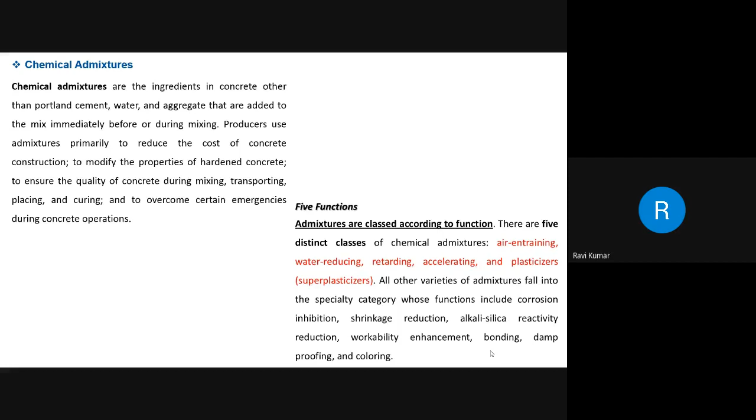My dear friends, other specialty admixtures include shrinkage reducing admixtures and alkali silica reactivity inhibitors. The shrinkage reducers are used to control drying shrinkage and minimize cracking, while alkali silica reactivity inhibitors, that is ASR inhibitors, control durability problems associated with alkali silica reactivity. With this small introduction about the inhibitors, we will move on to the next topic, working with concrete.

My dear friends, concrete is easy to work with, versatile, durable, and economical. But you should have standard operating procedures when you deal with concrete.

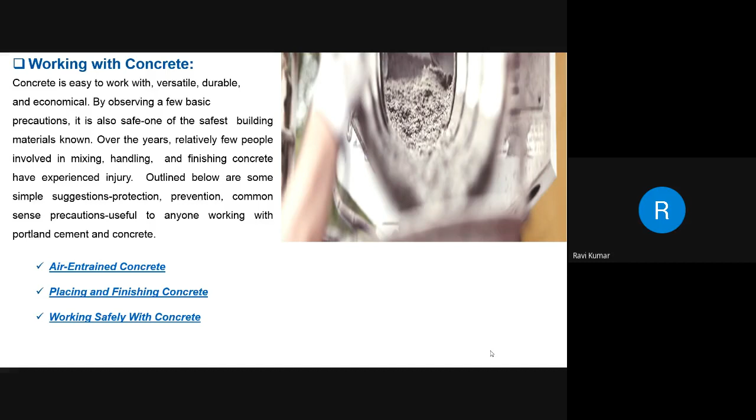When you deal with air entraining concrete, it contains billions of microscopic air cells per cubic foot. These air pockets relieve internal pressure on the concrete. My dear friends, if you see any retaining wall, there will be some drilled holes at 1 meter center to center, both horizontally and vertically. The purpose of these holes is to release the hydrostatic pressure. My dear friends, the retaining walls are designed against the earth pressure.

Whereas when the earth is exposed during monsoon, the rainwater will penetrate deep inside the filled earth behind the retaining RCC wall. It will percolate down and get stagnated at the bottom, creating a static pressure that we call hydrostatic water stagnant pressure.

For this pressure, we will not be designing. We will be focusing on designing for earth pressure. So this additional pressure has to be released. How can it be released? By introducing some holes that we call weep holes.

Through these holes, the water will be drained out. Moreover, when the water is draining out, it will wash away the filled up soil particles. To avoid washing of soil particles, a geotextile material is wrapped or pasted over the whole area so that it prevents the passage of soil particles and allows only the water through.

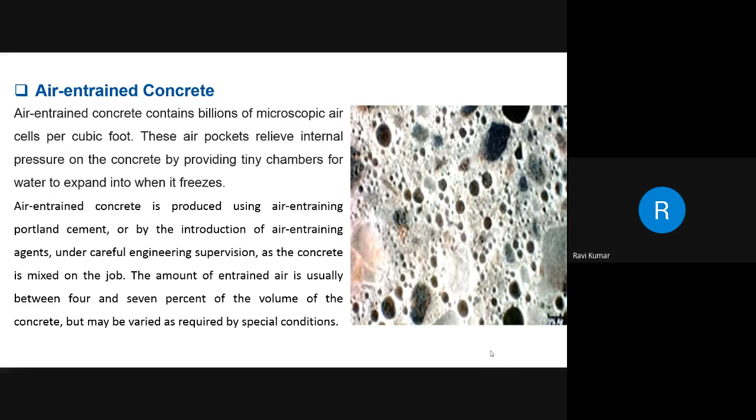Now, when it comes to placing and finishing of concrete, my friends, mixing, transporting, and handling of concrete should be carefully coordinated with placing and finishing operations. Whenever you are involved in a concreting project, preparation of concrete in the lab, mixing, transporting, and handling should be carefully coordinated with placing and finishing operations.

Concrete should not be deposited more rapidly than it can be spread, struck off, consolidated, and bull floated, and should be deposited continuously as near as possible to its final position.

My dear friends, in slab construction, placing should be started along the perimeter at one end of the work, with each batch placed against previously deposited concrete. Do not dump the concrete in separate piles and then level and work them together, nor should it be deposited in large piles and moved horizontally into final position.

My dear friends, the focus should not be just completing the concreting of a beam or slab. Your focus should be on how effectively you are placing the prepared concrete, and how effectively you are preparing it—mixing the cement, sand, aggregates, and water-cement ratio. If you want to add any admixtures, prepare the concrete suitably and effectively.

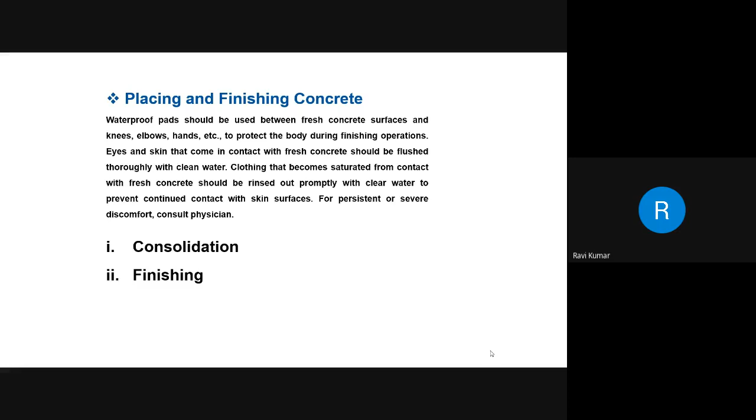Now we'll move on to the next topic, working safety. When you're dealing with concrete work, safety is very, very important. All safety precautions must be followed, and you have to use safety boards.

I don't know whether you are following this, but when you go to a lab, you have been asked by your lab in charge to come with shoes, and when you're mixing concrete, please start practicing wearing gloves, glasses, and a helmet. Start practicing the safety aspect at your work area from the lab.

When you start practicing this, you will feel easy and you will be following all the safety precautionary measures during your work in your work area when you come to the job. You also should insist that your workers under your supervision follow strictly, and you will enforce the safety measures.

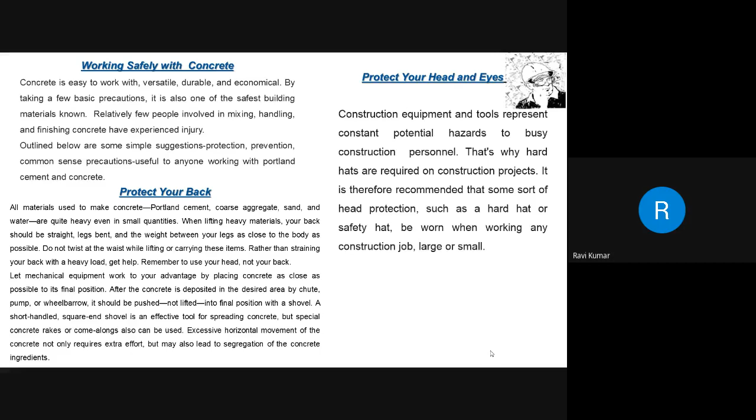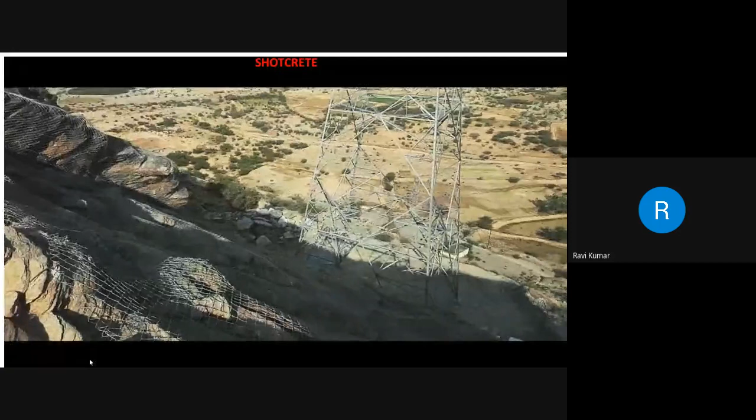Now we will see a small video about shotcrete. There are two terms, shotcrete or gunite.

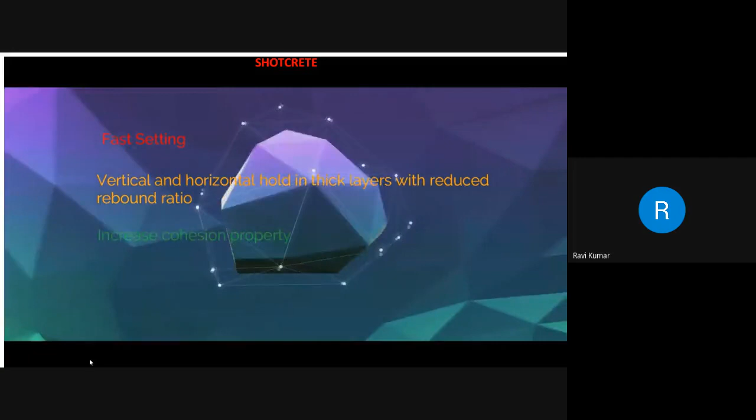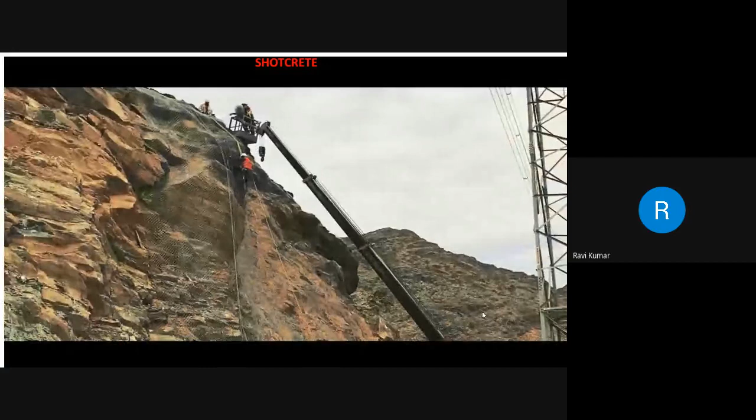Sir, are you able to hear the audio, no sir? Video is playing but audio, no sir. No sir, we can't hear it. Now sir, light. One second. Audio is too low, sir.

Perfect. Welcome back, friends, to this new video on slope protection. Here we will discuss slope stabilization by the shotcrete method.

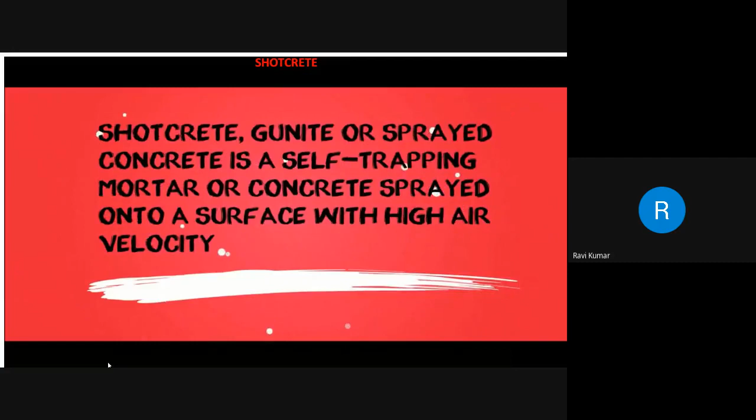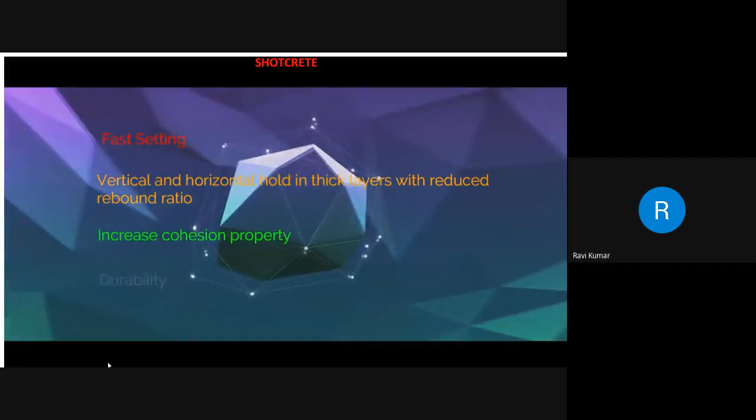Shotcrete, gunite, or sprayed concrete is a self-trapping mortar or concrete sprayed onto a surface with high air velocity. The purpose of using shotcrete in slope stabilization includes fast setting, vertical and horizontal hold in thick layers with reduced rebound ratio, increased cohesion property, and durability.

Now let us explore how shotcrete works are made step by step. At first, thoroughly clean all surfaces by removing loose materials and dust to avoid any collapse in future. Then fix wire mesh to the rock surface.

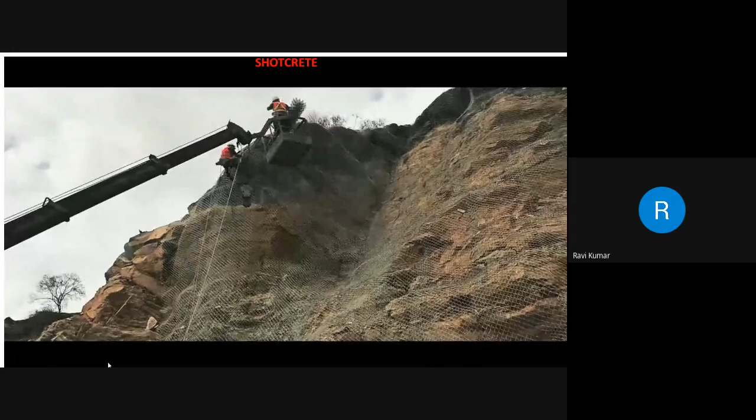The top portion of the wire mesh should rest on a stable surface where suitable pins or grouting are to be inserted over the rock. Grouting is to be done to prevent the mesh from sliding, and to ensure the mesh is in proper position and not disturbed during concrete spray.

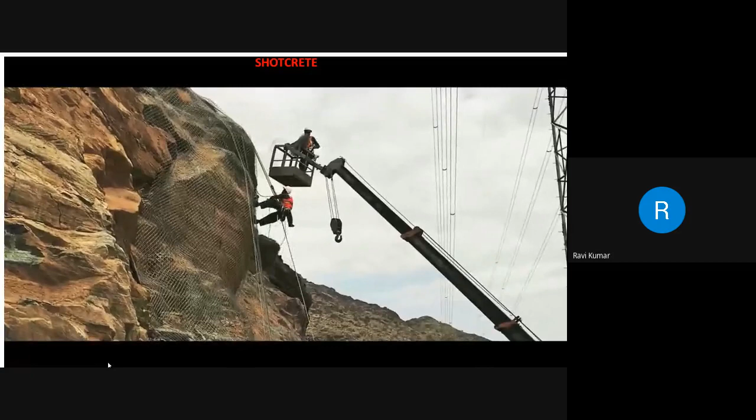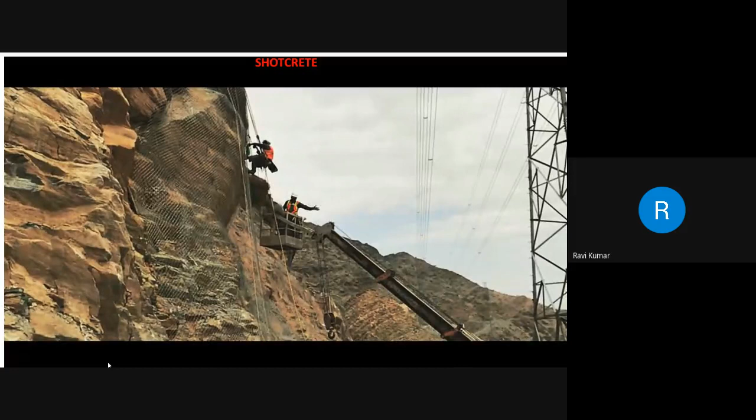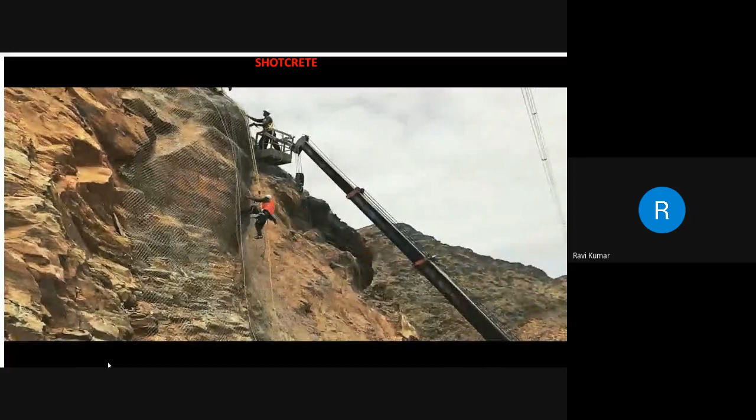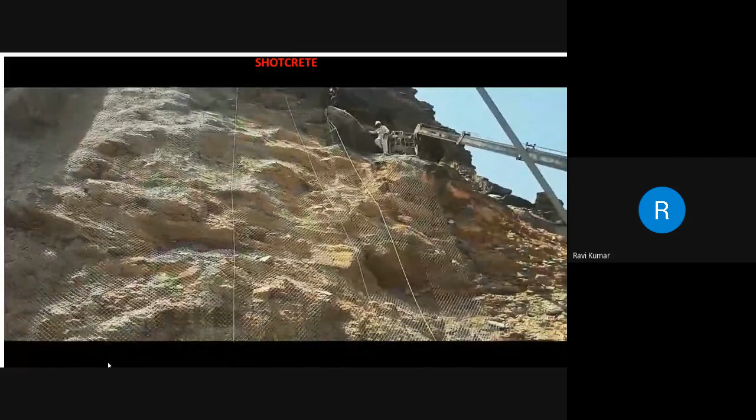The rock has numerous cracks, so by using the shotcrete method, those cracks will be arrested so that during the monsoon time, rain and water, which is the greatest enemy for landsliding as well as rock sliding, are controlled. When these cracks are arrested, even when water drains on the surface, it will avoid rock sliding or it will be minimized.

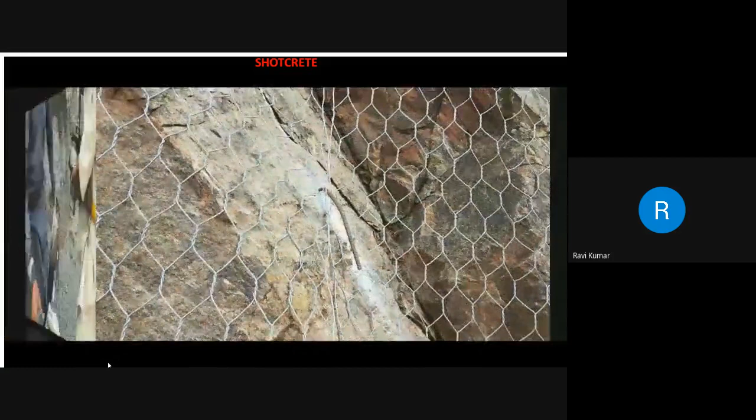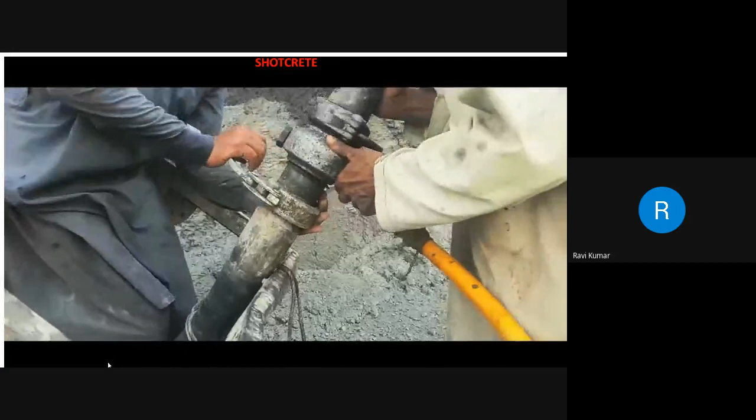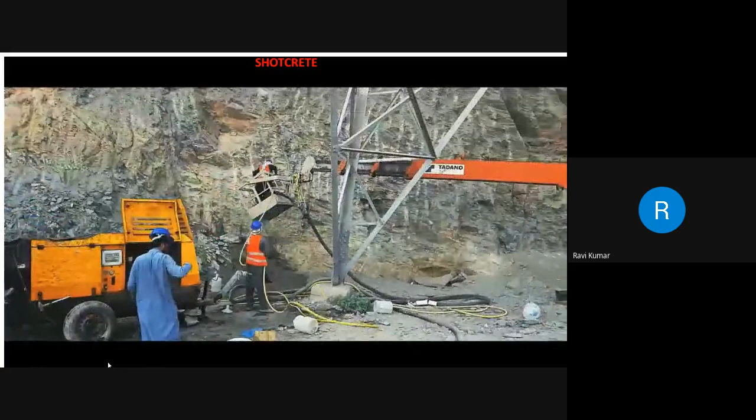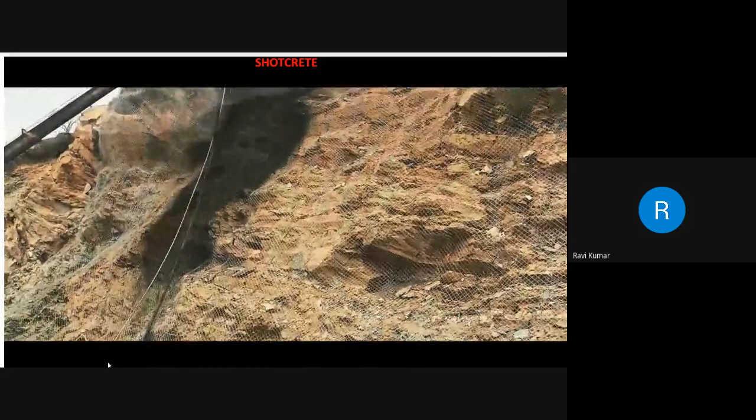When the pumped concrete mixture reaches the nozzle, turn on the compressor for air. This will help spray the concrete onto the surface with high velocity. Friends, when you are involved in shotcrete, you are going to apply the concrete at high pressure.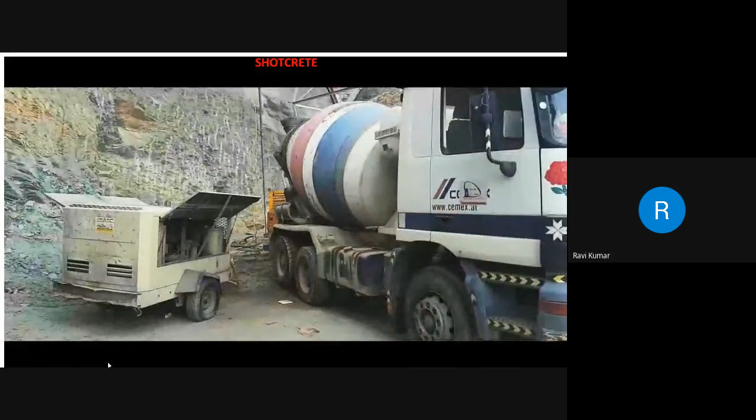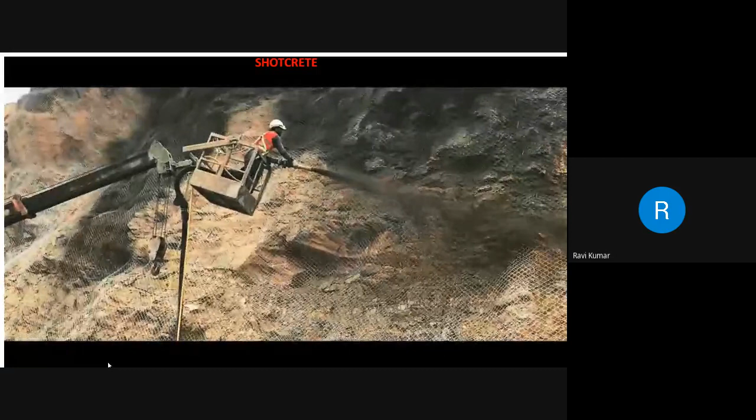If required, you can use some fiber also in the concrete mix. It may be steel fiber, carbon fiber, or glass fiber, so that the strength parameter will be enhanced.

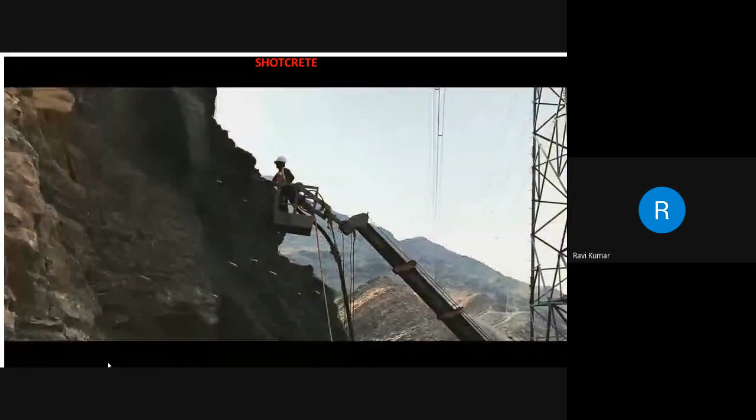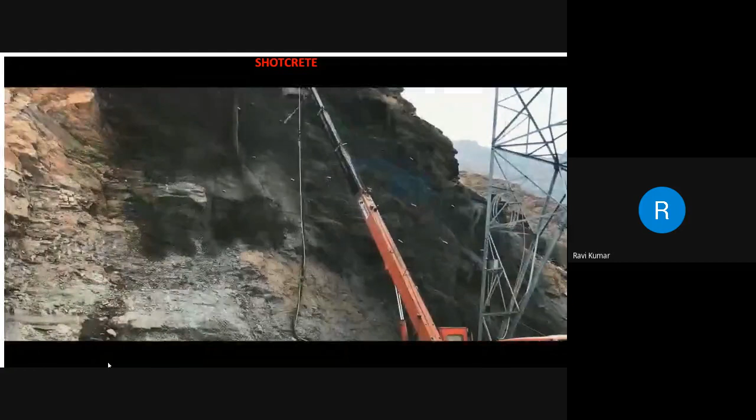Apply shotcrete evenly to the targeted surfaces and build up the desired thickness, approximately 10 to 15 mm. If you are going for a 40 mm thickness and voids are found, spray more concrete. Once the earlier sprayed concrete has attained strength, by using this methodology you will get a well-defined, well-bonded output.

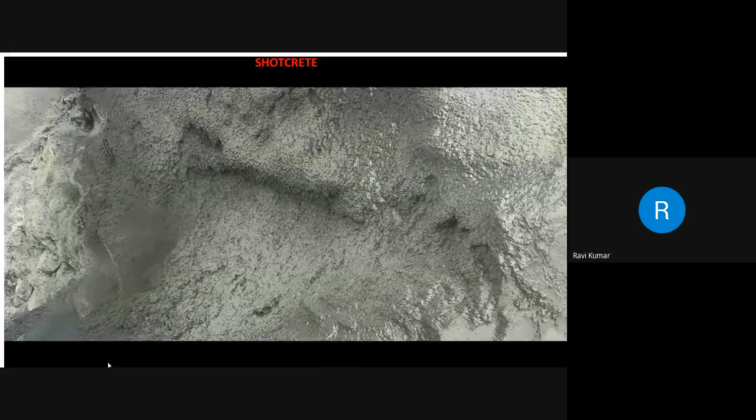Okay, so we'll move on to the next topic.

Friends, before getting into polymer concrete, let us also see what a binder is. A binder or binding agent is any material or substance that holds or draws other materials together to form a cohesive whole, mechanically, chemically, by adhesion or cohesion.

Natural cement is a hydraulic binder with rapid setting due to the formation of calcium aluminate hydrates. As a binder, natural cement has high compressive strength compared to lime mortar, but is still water vapor permeable.

Before getting into this, hello? Yes sir, yes sir. I'll just try to show one more video related to polymer concrete. Okay, just a moment, I'm stopping my presenting, I'll just take that video also. Please, just a second.

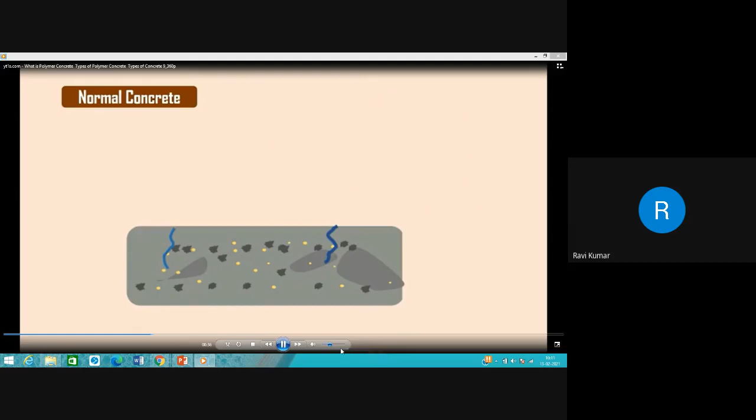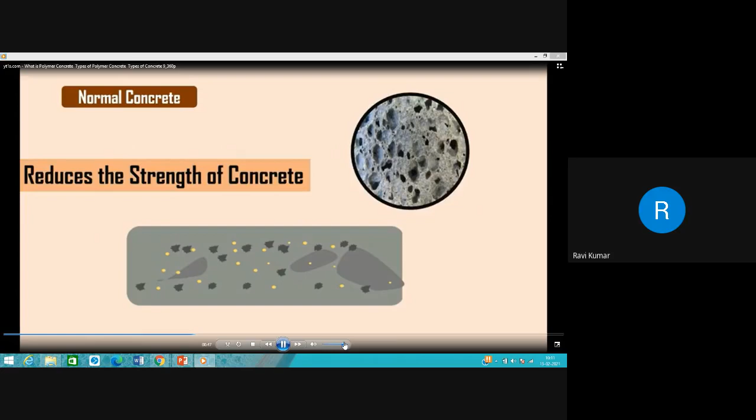Let us see a visual explanation of polymer concrete. Polymer concrete is a type of concrete that uses polymers either as a supplement or replacement for cement binders. In normal concrete, when the water dries out, it leaves pores. These pores become the entry of various liquids or gases, thereby damaging the concrete. The presence of pores also reduces the strength of concrete. To overcome these problems, polymer concretes are being developed.

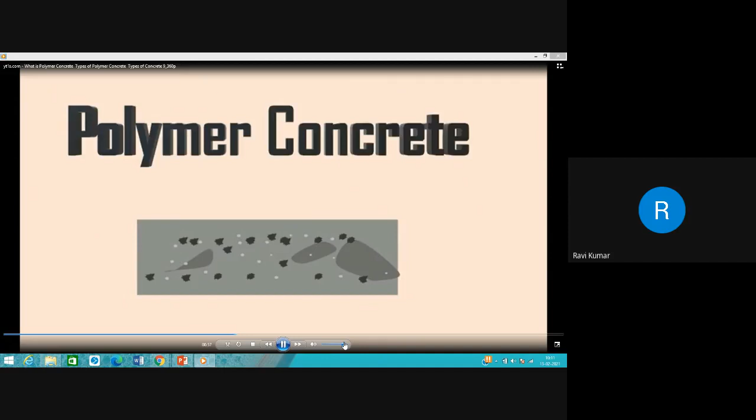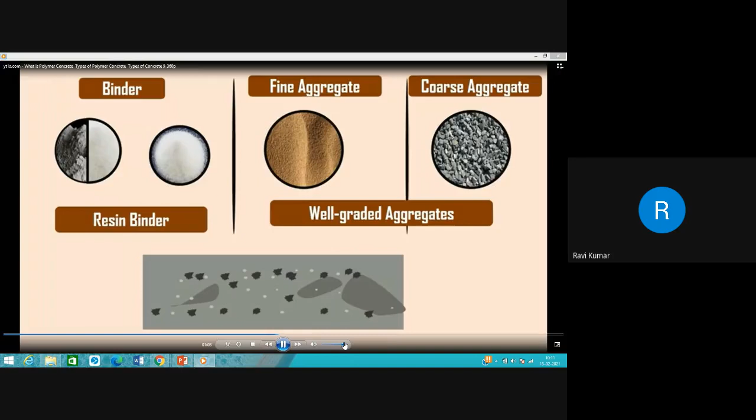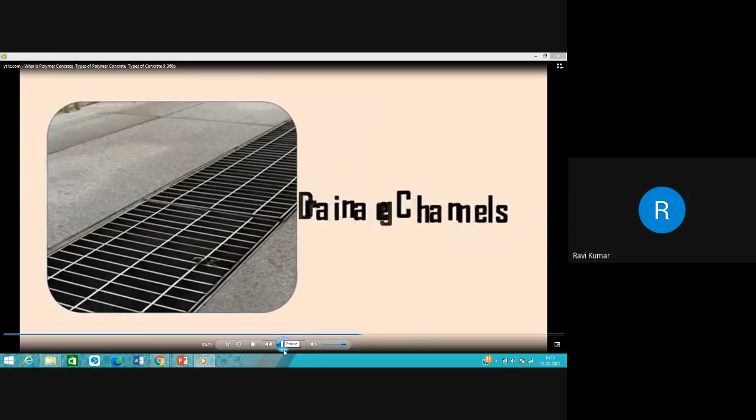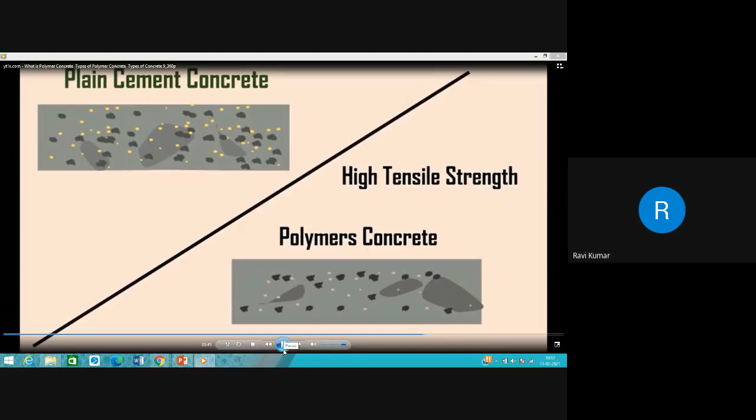Polymer concretes are relatively high-performance materials which consist of well-graded aggregates bonded together by a strong resin binder instead of cement, either partly or fully, to form a required matrix. The polymer concretes are low permeable and corrosion resistant, thus used in swimming pools, sewer structure applications, drainage channels, etc. It is especially used for construction and rehabilitation of manholes in sewer systems. Polymer concrete has high tensile strength compared to plain cement concrete. The polymer concrete is prepared in different ways, namely normal polymer concrete, polymer modified concrete, polymer impregnated concrete, and partially impregnated and surface coated polymer concrete. We will see this one by one.

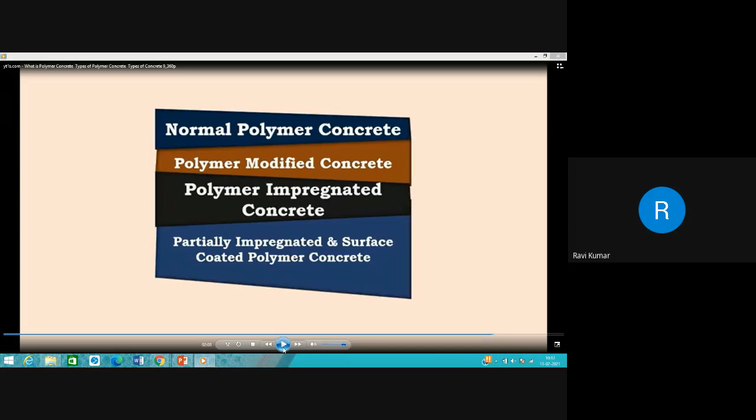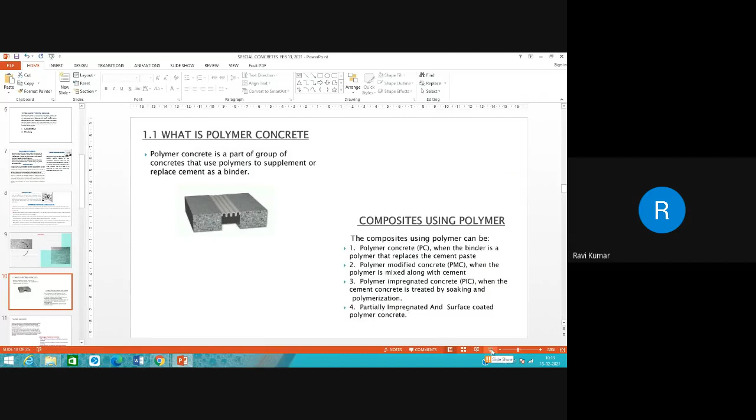Fine. I hope now, friends, you have understood some idea about what is polymer concrete. It is a group of concrete that use polymers to supplement or replace cement as a binder. So now we have seen what is a binder. The composites using polymer can be polymer concrete, polymer modified concrete, and polymer impregnated concrete. That means when the cement concrete is treated by soaking and polymerization. Polymer modified concrete means when the polymer is mixed along with the cement. Polymer concrete is when the binder is a polymer that replaces the cement paste.

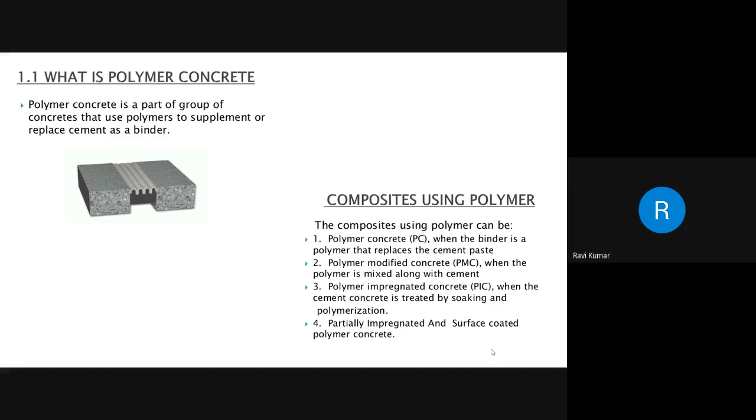Now, what are the advantages of polymer concrete? It has high impact resistance, high compressive strength. It is highly resistant to freezing and thawing, highly resistant to chemical attack and abrasion, and its permeability is lower than other conventional concrete.

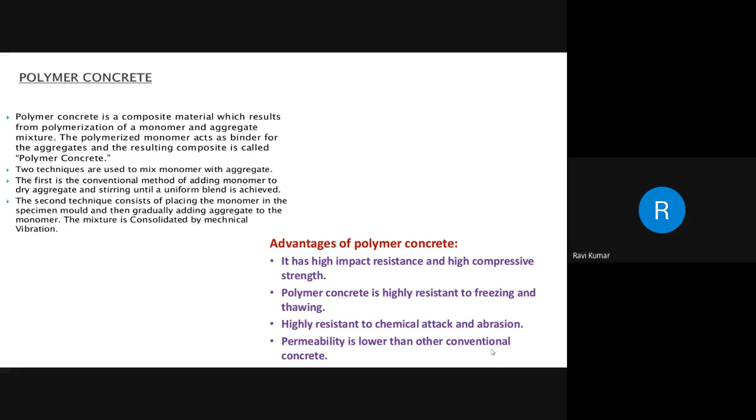Friends, the chemical reaction of cement with water requires a water cement ratio of less than 0.38. Please make a note of it. Whereas the adopted water cement ratio is much more than that, mainly because of the requirement of workability, which is also important for concrete, so it can be placed in the formwork easily without honeycombs. After the requirement of workability is over, the excess water will eventually evaporate, leaving capillary pores in the concrete. These pores result in high permeability and less strength in the concrete. Therefore, workability and high strength don't go together, as the requirements are contradictory to each other.

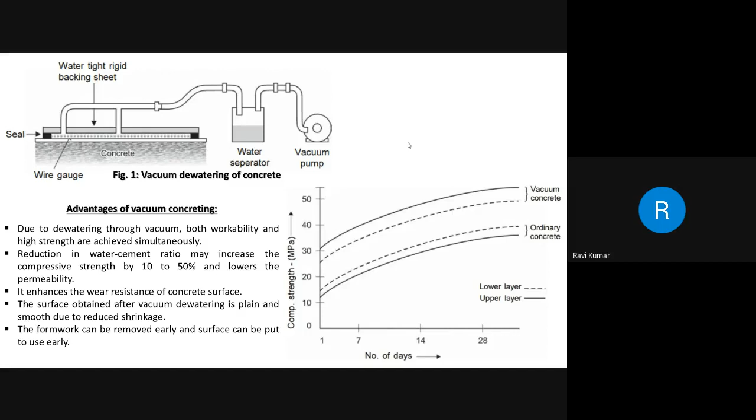Next comes the self-consolidating or self-compacting concrete, that is SCC in short form. It flows and consolidates on its own because it is a flowable concrete. It was developed in Japan in the year 1980.

It uses an increased amount of fine material, that is fly ash or limestone filler, along with superplasticizers that we have discussed earlier. The strength and durability are the same as conventional concrete, and because it is of extreme fluidity, there's no need for vibrators to compact the concrete as is practiced in normal concrete.

Conventional concrete uses tapping with an 8 mm rod in the lab while casting the cube. You can try casting cubes using this SCC, self-consolidating or compacting concrete, with no need for any needle vibrator or shuttering vibrator.

Because of its extreme fluidity, it flows under gravity and consolidates on its own. Placement is easier because it is a fluid, with no bleed water or aggregate segregation. My dear friends, I have tried my best to put together a pictorial representation.

of the percentage of aggregates in comparison with regular mix and self-consolidating concrete. In terms of cement, it's 10% for regular mix, whereas it is also 10% for SCC. Water 18%, air 2%, fines 8%, then fine aggregates 26%, coarse aggregate 36%, whereas for regular mix it is 45%.

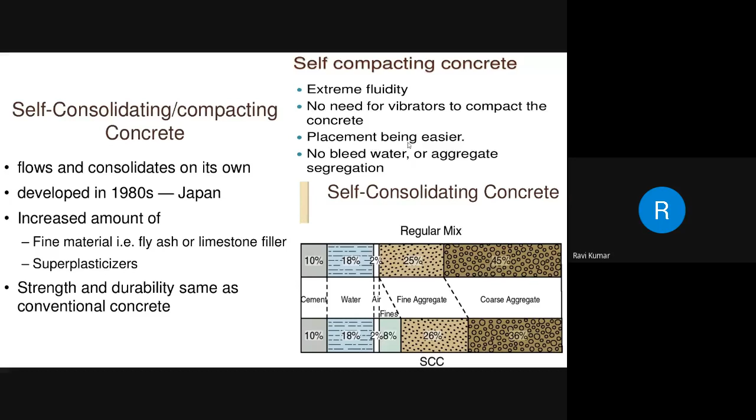Next comes your reactive powder concrete, RPC. It is composed of very fine powders: cement, sand, quartz powder, and silica fume. Steel fibers are optional, and superplasticizer is also used.

A very dense matrix is achieved by optimizing the granular packing of the dry fine powders. This compactness gives RPC ultra high strength and durability. RPC has compressive strength ranging from 200 MPa, that is 200 Newton per square millimeter, to 800 MPa or Newton per square millimeter. The properties of RPC are high strength and very low porosity.

These properties are achieved by using maximum particle size less than or equal to 300 microns, optimized particle packing, low water content, steel fibers which are optional, and heat treatment.

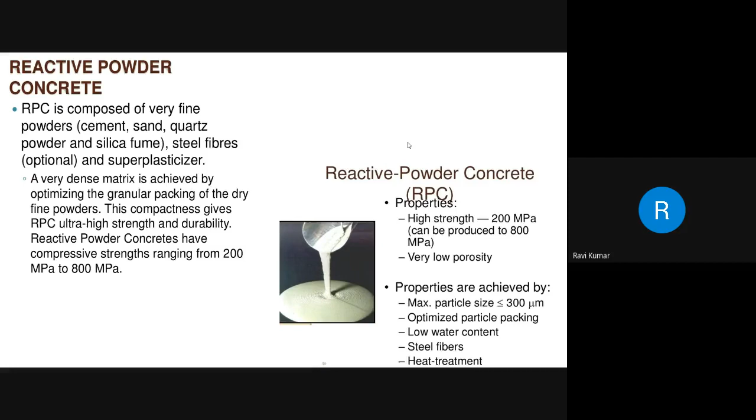I tried to bring a pictorial representation of RPC concrete. The left-hand side of this slide describes the raw materials: cement, sand, silica quartz, silica fume, microfibers, mineral fillers, superplasticizer, and water. The right-hand side table shows the mechanical properties in comparison with 80 megapascal normal concrete.

The properties comparison is with reference to compression strength, flexural strength, tensile strength, modulus of elasticity, fracture toughness, freeze-thaw, carbonation, and abrasion.

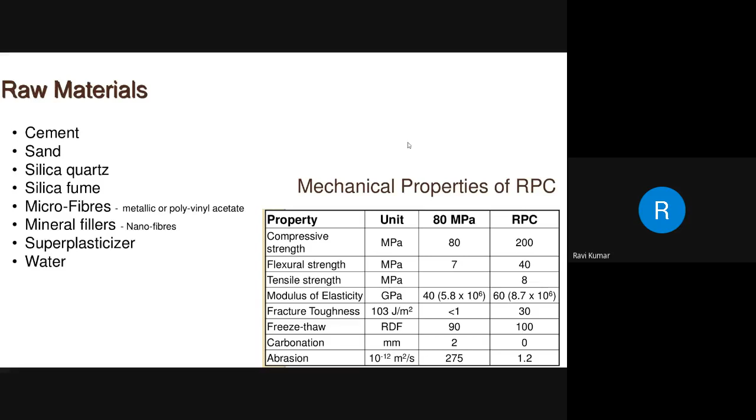Now the typical mix, under a water cement ratio of 0.2 for the RPC: in terms of percentage, cement 28 to 30%, silica fume 9 to 10%, crushed quartz 8.5 to 9%, sand 42 to 43%, fibers 6 to 7%, superplasticizer 0.6%, and total water 5.5 to 6%. There are no aggregates in this mix.

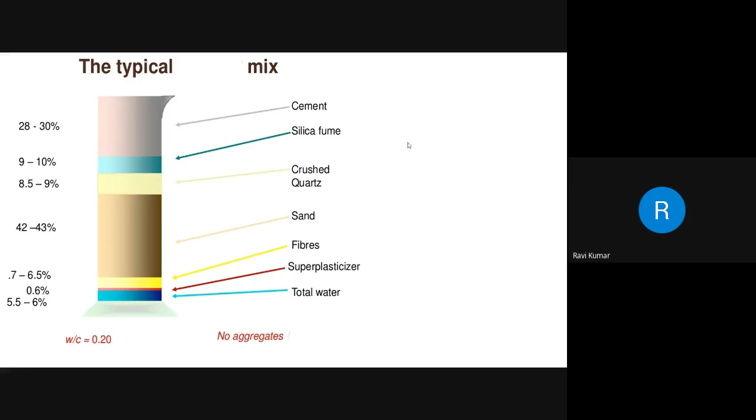This slide describes the principles involved in developing the RPC: elimination of coarse aggregate, as we have seen in this slide already; optimal usage of superplasticizer to reduce water cement ratio and improve workability; application of pressure to improve compaction; and addition of small size steel fibers to improve ductility.

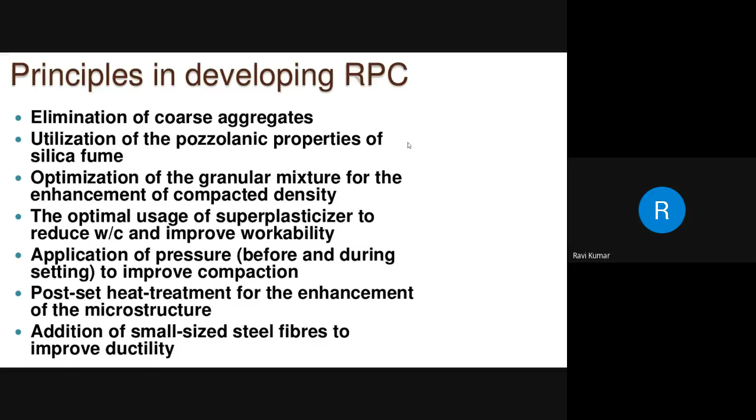High strength concrete, with reference to compressive strength, is classified as between 50 to 100 megapascals. From 100 to 150 megapascals, it is classified as ultra strength concrete. When you achieve more than 150 megapascals, you name it special strength concrete.

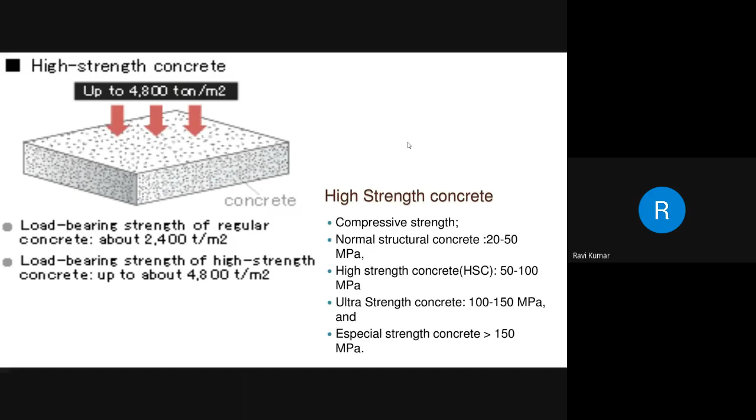Next is placing, consolidation and curing. Delays in delivery and placing must be eliminated. Slump generally varies from 180 to 220 mm. The aggregate size for high strength concrete, HSC, is 10 mm to 20 mm, and it also requires 7 days moist curing.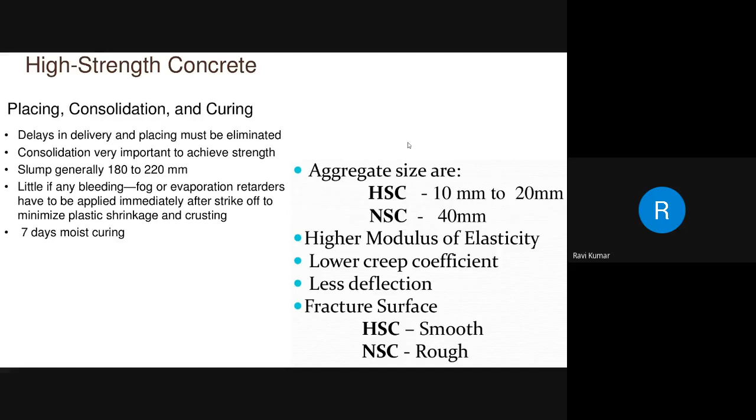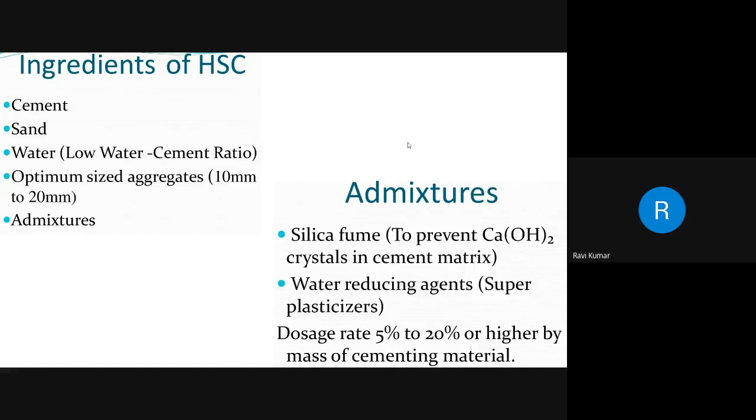Next comes HPC. We have discussed high strength concrete, HSC. Now we are going to deal with HPC, high performance concrete. The US Federal Highway Administration has revised the definition of HPC for highway structures. HPC is concrete that has been designed to be more durable and, if necessary, stronger than conventional concrete. So when dealing with HPC, the importance is with reference to its performance, that is, durability based.

So there are 4 types of HPC: one is with reference to very early strength, 14 Newton per mm square or 14 megapascal in 6 hours; high early strength, 34 megapascals in 24 hours; very high strength, 69 megapascals in 28 days; and high early strength with fiber reinforcement.

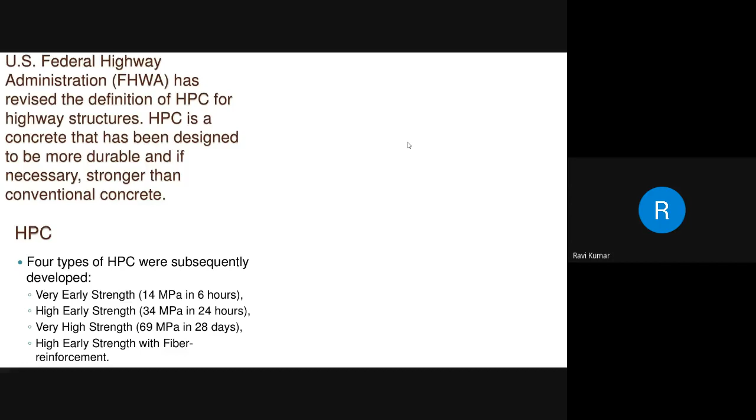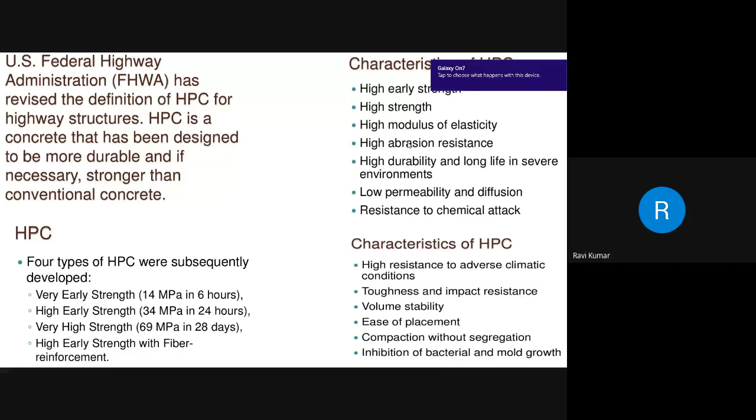Now next comes, before we discuss concrete from industrial waste, let us see geopolymer concrete. It is a type of concrete made by reacting aluminate with silicate bearing materials with a caustic activator. Commonly, waste materials such as fly ash or slag from iron and metal production are used, which helps lead to a cleaner environment.

During my first session, one of your classmates asked about the usage of alternative materials. So with geopolymer concrete, you will be using slag from iron ore industries or fly ash, as an addition or replacement to cement. It has a low heat of hydration compared to cement concrete. Fire resistance is considerably better than ordinary Portland cement concrete, OPC. Geopolymer concrete offers better protection to reinforcement from corrosion compared to traditional cement concrete, and gives better resistance to sulfate attack than normal concrete. So that's a brief about geopolymer concrete.

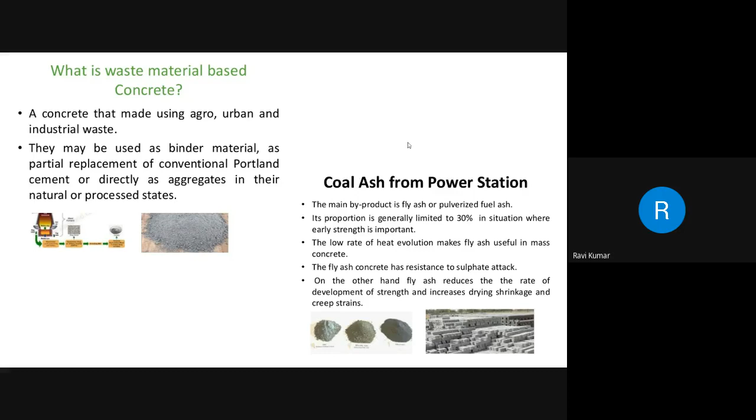The red mud aggregates come from industrial waste. It is a byproduct resulting from the production of alumina from bauxite by Bayer's process, known as red mud. Concrete made with this aggregate has more compressive, tensile, and flexural strength than gravel concrete.

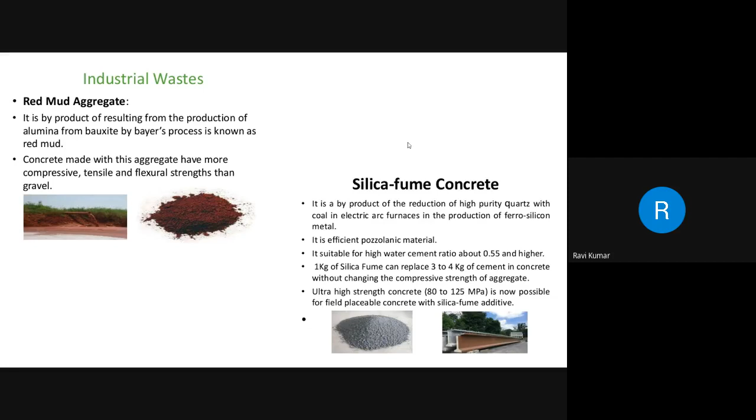Next is silica fume concrete. It is a byproduct of the reduction of high purity quartz with coal in electric arc furnaces during the production of ferrosilicon metal. It is an efficient pozzolanic material, suitable for high water-cement ratio of about 0.55 and higher. 1 kg of silica fume can replace 3 to 4 kg of cement in concrete without changing the compressive strength of aggregates. Ultra high strength concrete, 80 to 125 megapascal, is now possible for field placeable concrete with silica fume additive.

Now comes fiber reinforced concrete. It is defined as a composite material consisting of a mixture of cement, aggregate, and uniformly dispersed fibers. The fiber is a small piece of reinforcing material possessing certain characteristic properties. The fiber is often described by a convenient parameter called aspect ratio, which is the ratio of its length to its diameter. The typical aspect ratio ranges from 30 to 150.

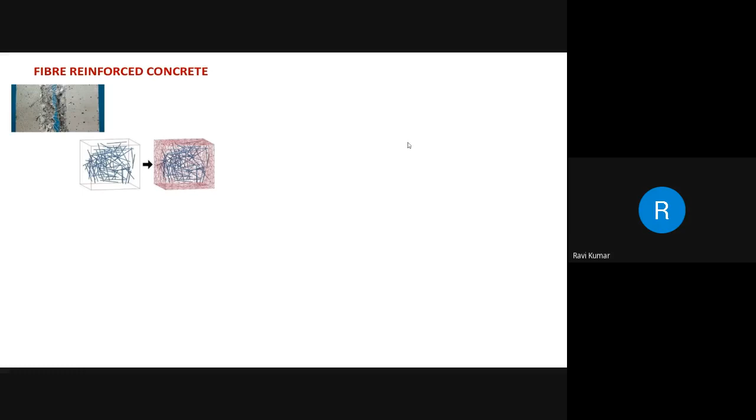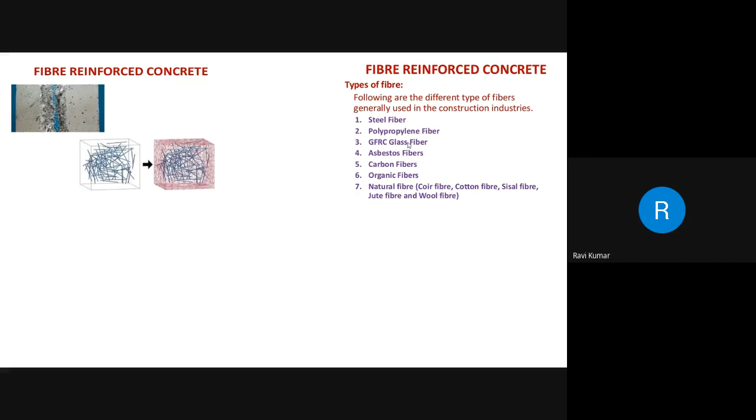Now, what is the necessity of FRC? It increases the tensile strength of concrete, reduces air voids and water voids, increases durability of the concrete, and substantially improves its static and dynamic properties. Fibers such as graphite and glass have excellent resistance to creep, and it also acts as a crack arrestor.

You have seen in shotcrete, the concrete is pumped at high pressure over the object where you want to do shotcreting. When you mix in fiber concrete, it adds value not only in strength but also acts as a crack arrestor.

That's why, in rock cutting, to avoid rock sliding, generally an outer layer blanket of geomaterial or geotextile, or wire mesh, galvanized wire mesh, is applied. Galvanized wire mesh is used to overcome the corrosion effect, and over that they apply fiber reinforced concrete shotcrete. The fiber may be steel fiber, but you have to avoid using steel fiber when the environment is subjected to high corrosion. So you can go for other types of fibers like carbon fiber, glass fiber, or polypropylene.

Excuse me sir, there is a question in the chat box from one of the students, Mr. Praveen Kumar. He is asking, sir, you have mentioned about various types of concrete and cement. In terms of sustainability, only PPC and geopolymer seem to be supplementary for conventional concrete. Does this mean we are going to face a crucial resource shortage soon in our field?

Sir, we always practice ourselves with many varieties of concrete. See, once we used to practice the preparation of concrete only using river sand, natural sand. Now we have started using manufactured sand.

Now there is a huge demand for the manufactured sand also. The same way, there will always be an alternative developed. Whatever we have discussed in this journey of today's session is already existing. It is already being used at various site locations depending upon the environmental condition, depending upon the type of component, depending upon the cost, and depending upon the type of curing also.